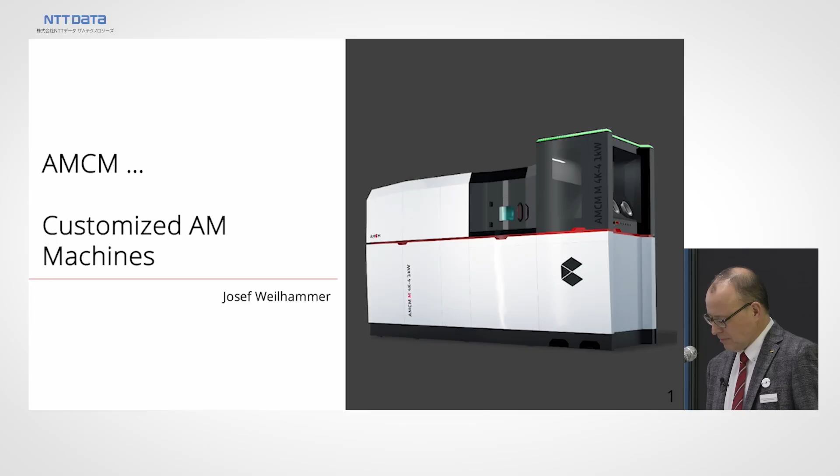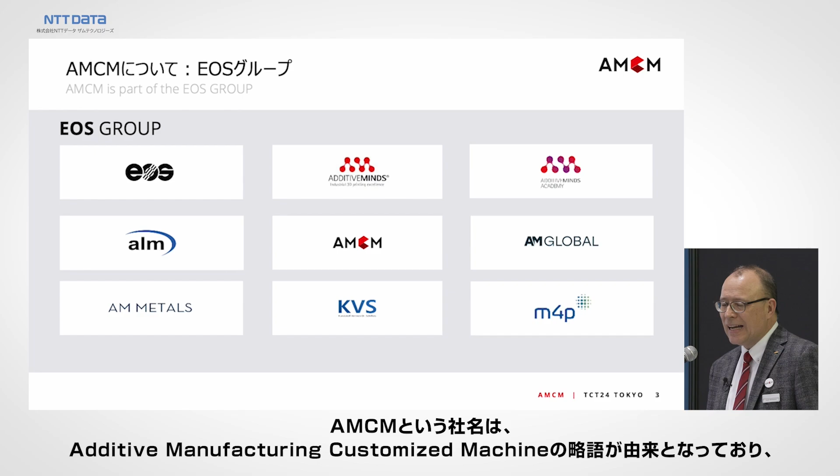Short agenda: some words about AMCM, facts and figures, system portfolio and roadmap. So first, what is the name AMCM? It's an abbreviation of Additive Manufacturing Customized Machine. So what do we do? We customize EOS machines. AMCM is a company in the EOS group, or better call it Langer Group. We are an independent company next to EOS, Additive Minds and AM Global. We are in this group from the Langer company.

Who we are? We are people from, let's say, two sectors. The first group of people is from a laser company, Baasel Lasertech. They have decades of experience in producing lasers and optics. Baasel Lasertech was sold to Coherent, but the team, the R&D people, stayed there in Starnberg. And the other part of the team is EOS people, like me. I worked 23 years at EOS as application engineer, trainer, and also product manager. And also many other product owners and product managers are now in the team.

Short history. In 2016, one year before, Hans Langer spoke with Martin Bullemer: when do we do the machines that we don't do at EOS, because they are so special and we cannot do it at EOS? Then Martin said, I have an idea. I have some former colleagues from Baasel Laser and we can do such customizing. So then the company was founded in 2017.

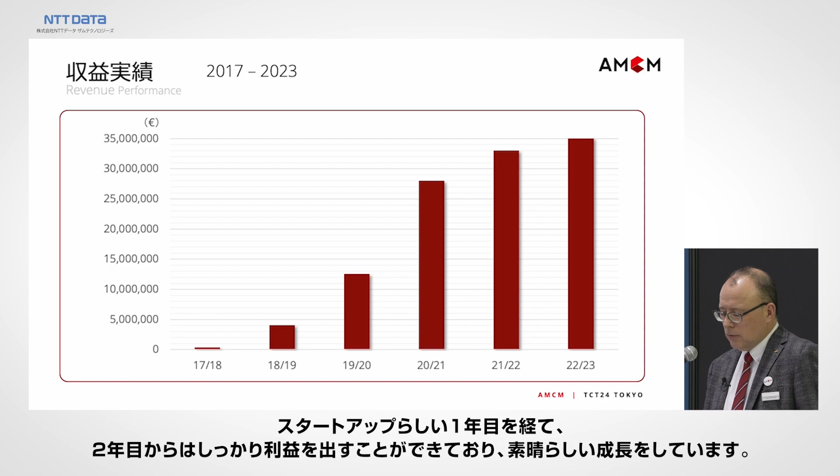So facts and figures. In the first year, Hans Langer gave money. A startup is not earning money from the first year, but from the second year we earned money, and our story is quite nice, we had a good revenue. This is our location in the former building of Baasel Lasertech. In Starnberg we have 5,000 square meters of production area. We can do parallel production of 12 M290s, 4 M4Ks and 2 M450s.

We are very technology driven in our team, so a lot of engineers, product managers, application engineers, and also a service team. We have our own software colleagues and also logistics, but the benefit of the EOS group is we can use shared services from EOS, like IP or also software that comes from EOS. Here is a picture of our production site where we can have 4 M4Ks next to each other in production.

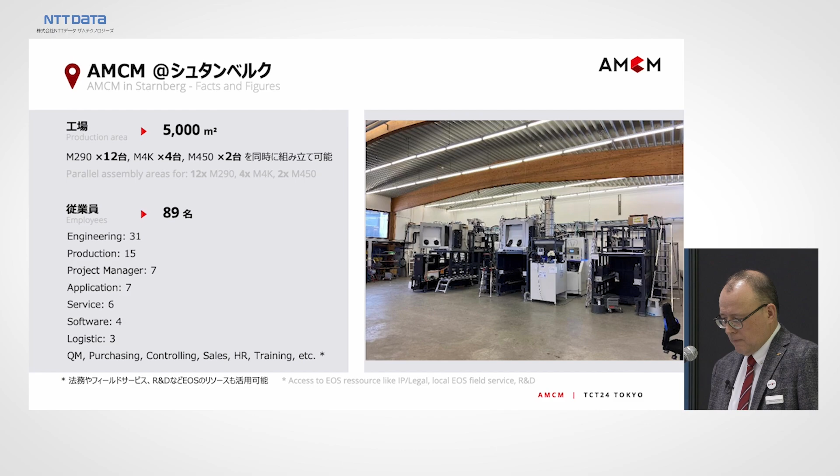We are present worldwide, we have installed already 116 systems: 40 in North America, 57 in Europe, 19 in Asia, and 2 in Australia. And you see it's a mix of metal and plastic machines, mainly metal, but we also do customizing of plastic machines.

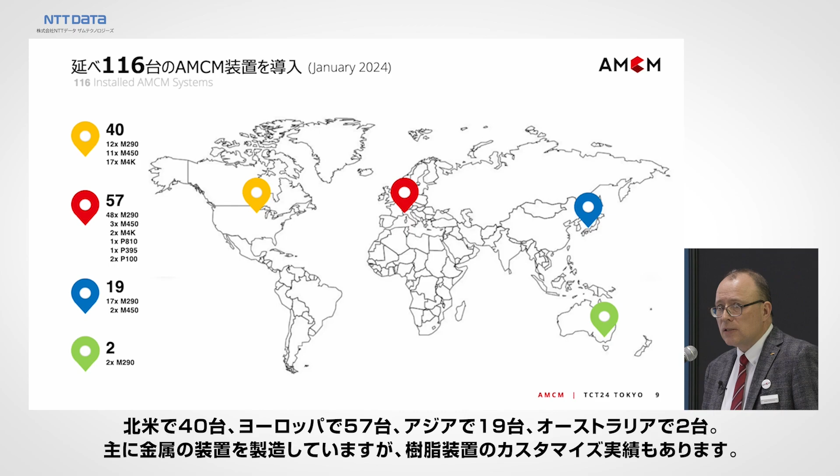Maybe a short phrasing of our vision. We do tuning of EOS machines. You see on the left-hand side machines which look outside still like an EOS machine. They might have a stronger laser or a bit bigger envelope, but this is what we call tuned. The modification is quite easy and the lead time is quite short. On the other side is what we call customized machines. These machines have more modification and they do not look like EOS machines, or they are a bit modified, but this is also a good business part, and today it's about a 50-50 share.

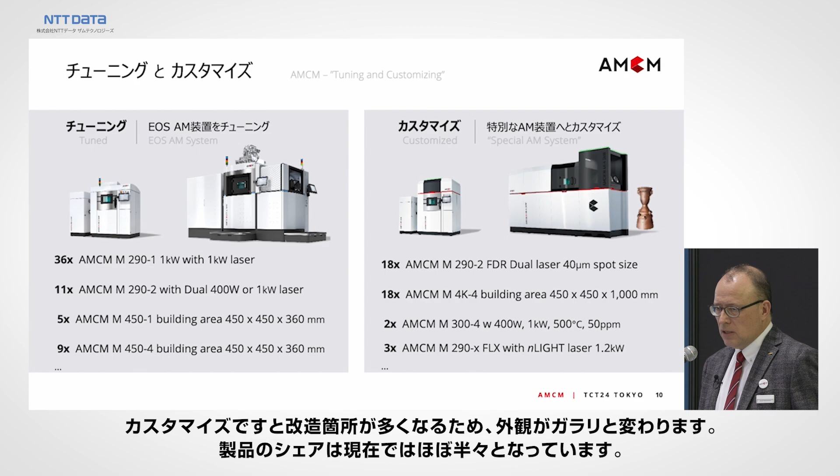Also from this M4K system, we sold so far 20 systems. Most of them are in aerospace and in the service provider area, and there will soon also be one system installed in Japan.

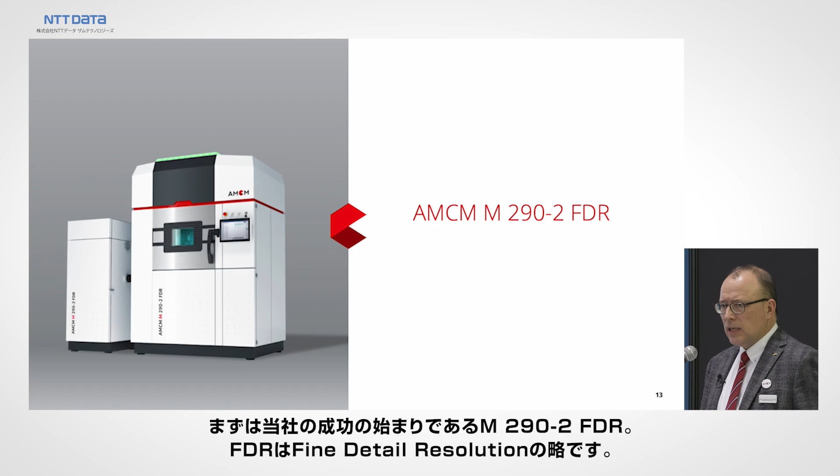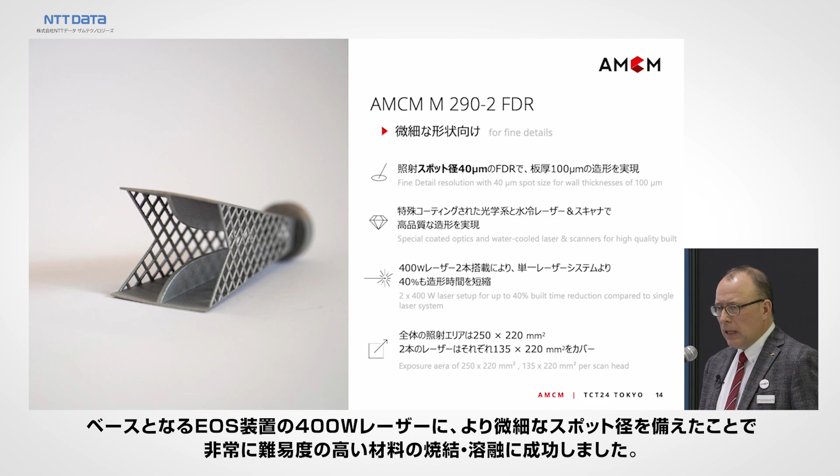Now to our system portfolio. The beginning of our success story was the M290-2 FDR. FDR stands for Fine Detail Resolution, and the purpose of that machine is, with a very fine spot of 40 micron, to make fine structures, and especially with this EOS machine basis with a 400 watt laser and finer spots, we were able to sinter and melt very challenging materials. And I come to that.

The customer has an application, computer tomography. I think many of you know that device. Computer tomographs need a so-called anti-scatter grid. When a patient lies in that computer tomograph, the X-ray source passes the body and is guided through these anti-scatter grids onto a detector.

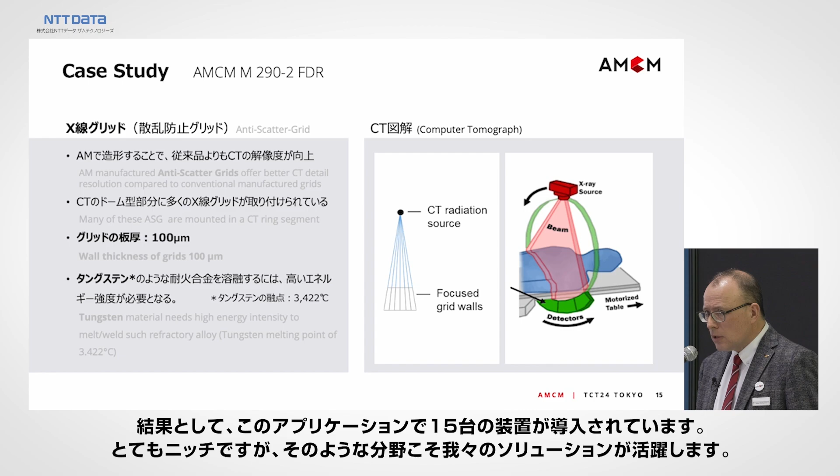The benefit of an additive-made anti-scatter grid is you can take the pictures with less X-ray dosage, and the additive-made anti-scatter grid produces better detail resolution. So the benefit for the patient is double: you have less dosage during the computer tomography treatment, and you have a better detail resolution. We sold more than 15 systems for the same application, so it's a niche, but this is our business.

So that anti-scatter grids are done in tungsten, but the machine can also run stainless steel like 316L or titanium or cobalt chrome. We can supply you also with parameters for these materials on request.

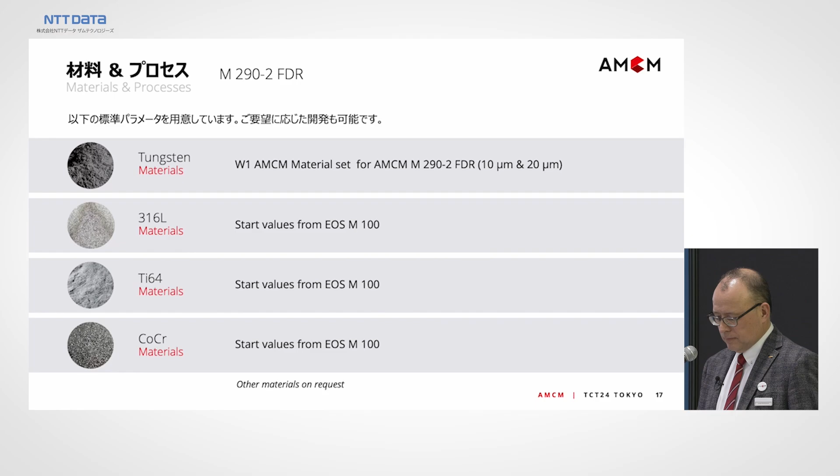The next machine, also similar to EOS, is an AMCM M290 with two 1 kilowatt lasers. The benefit is two lasers. It's like with a car, 4 wheels driven is better than 2 wheels driven, more power. So we have 2 times kilowatt on board.

Kilowatt is relevant for copper or difficult materials, and we have the same spot size as the EOS M290, so you can also use the experiences done on your M290 history, and definitely you can increase the productivity and reduce the cost per part. And also what I will show, we modified the cooling and the gas flow.

It's a bit like in a car. If you equip a car with a strong engine, you also have to increase the performance of the brake or the performance of the cooling, or increase the aerodynamics. The same is what we do. We put more power on the machine, and then we add additional equipment to bring the power on the street.

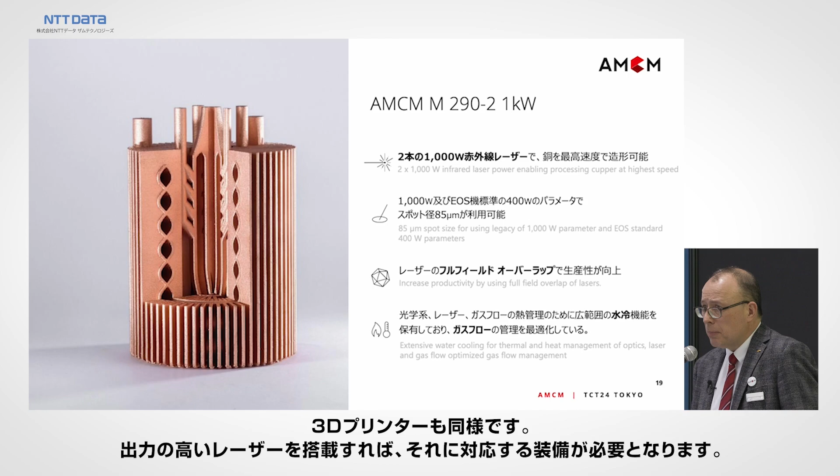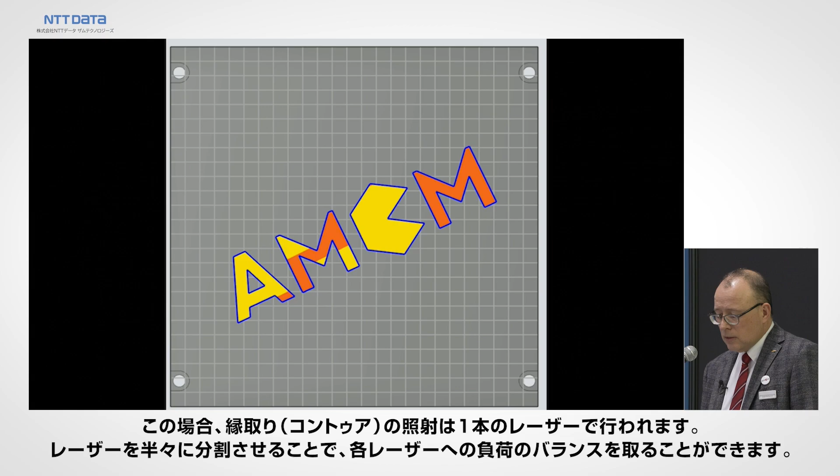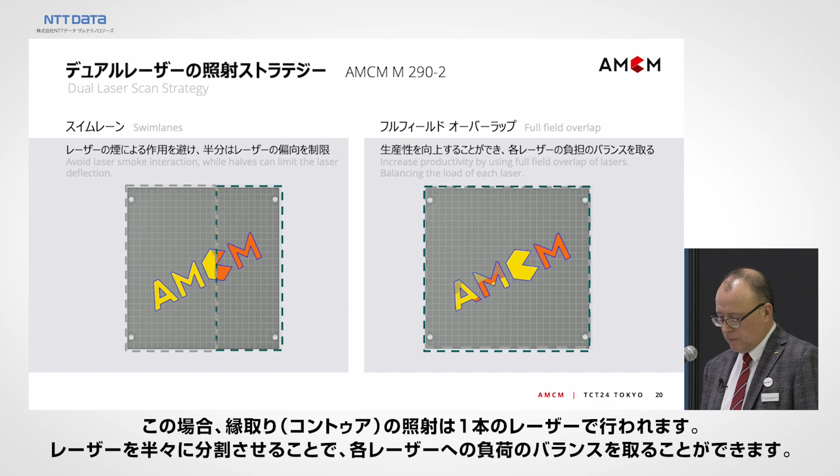The M290-2 has a so-called full field overlap. So we have a scanning strategy where you can either make a split line, what you see on the left-hand side, or you have a so-called full field overlap, where both lasers work in parallel, simultaneously, and finally the contour is done with one laser. So the benefit is you have really a perfect 50-50 split and perfect load balancing. So a very cost-efficient, productive machine.

So this is what I said. If you tune a machine, if you tune a car, you need some improvements. The main improvement to handle 2 times kilowatt is getting rid of the heat, because 2 lasers with 2 kilowatts produce a lot of heat, especially producing aluminium or copper.

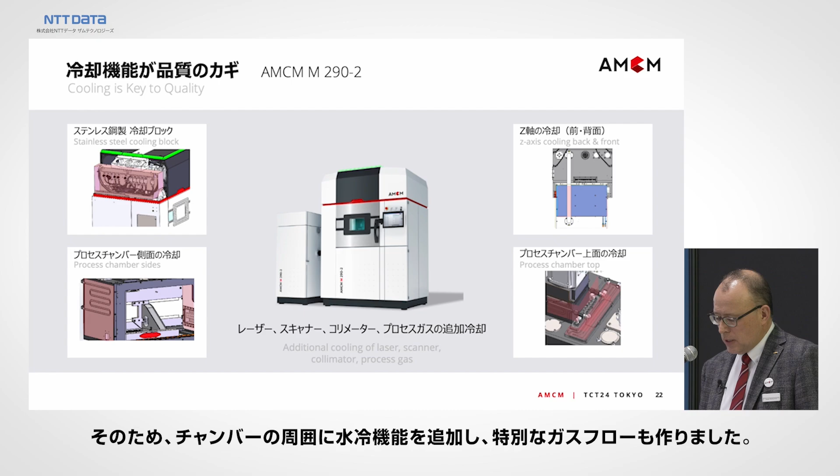So more or less all around the process chamber we add additional water cooling, and we made a special gas flow as well, because whenever you have looked in an additive metal machine and you see the welding process, you also saw the smoke. This is just a side effect of any welding. And having two strong lasers, you just have to improve the gas flow to get rid of these process side products.

And here we made a so-called flow box, which produces a kind of laminar flow to enter a wider flow nozzle and produce a homogeneous gas carpet to remove the gas and the smoke away from the powder bed.

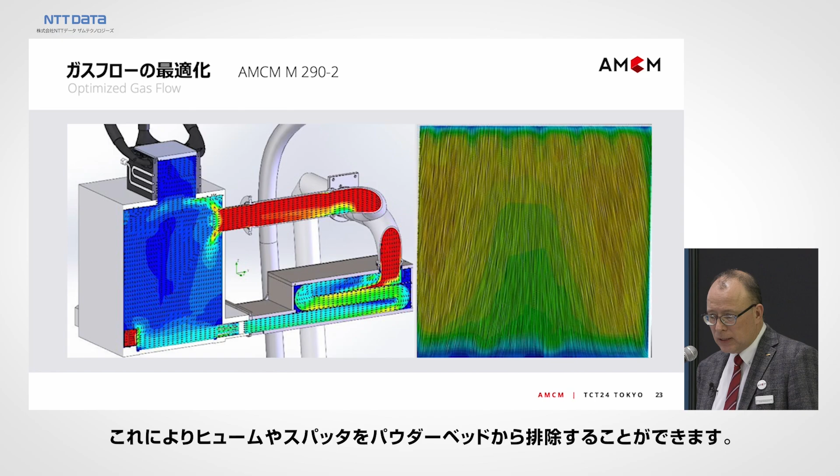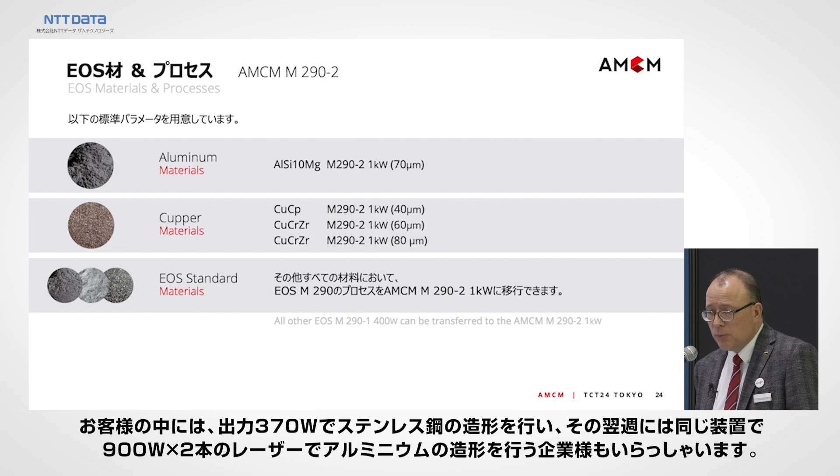Typical materials are aluminium and copper, but all materials which EOS has developed, like tool steel or stainless steel, are also possible on that machine. We have service providers which use that machine one week, maybe with stainless steel, just using 370 watts. And the next week they use the same machine with a maximum power of 2 times 900 watts on the powder bed, maybe with aluminium. So that gives you high flexibility with this machine.

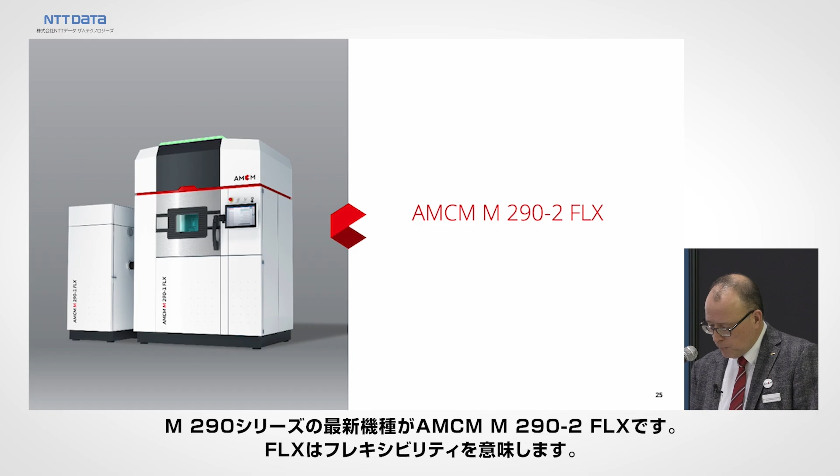The latest product in the M290 version is the so-called M290-2 FLX, FLX for flexibility. As I said, AMCM R&D people have developed lasers for quite a long time. We did a cooperation with nLight, and the result was an AFX laser. An AFX laser which has an additional parameter: you can form the beam.

So directly out of the laser, you get different beam diameters. No defocus, no optical lenses moving. So within 30 milliseconds, you can switch from small beam to big beam. So for R&D people, it's just one parameter more next to laser power, scan speed, or hatch distance.

So in index 0, the default, you have a Gaussian beam. This is like today's IPG laser on the EOS machine. And in index 6, you have a donut, which could be quite big. And in between, the sizes are between 85 and 210 microns. So it's possible to produce a part with maybe the contour in 85 microns, the in-skin in 210, and maybe the support in 180 microns.

The laser has a high power, nominal power 1.2, and in the big mode, we have an effective laser power of 1.1 kilowatts on powder bed. So very, very high laser power.

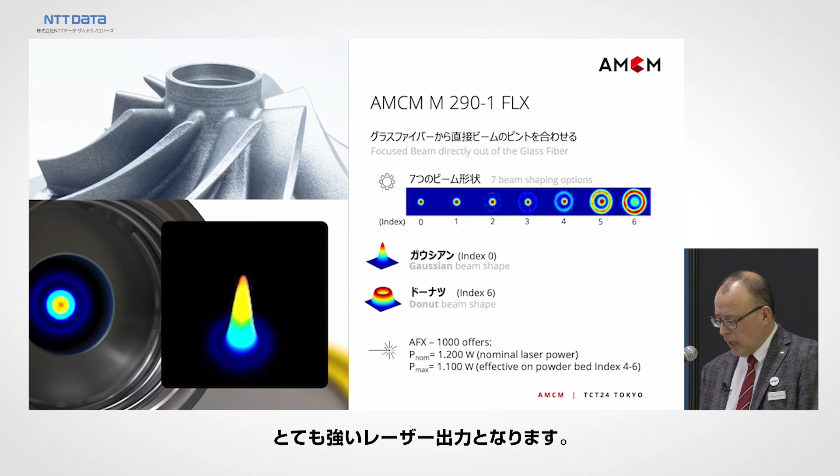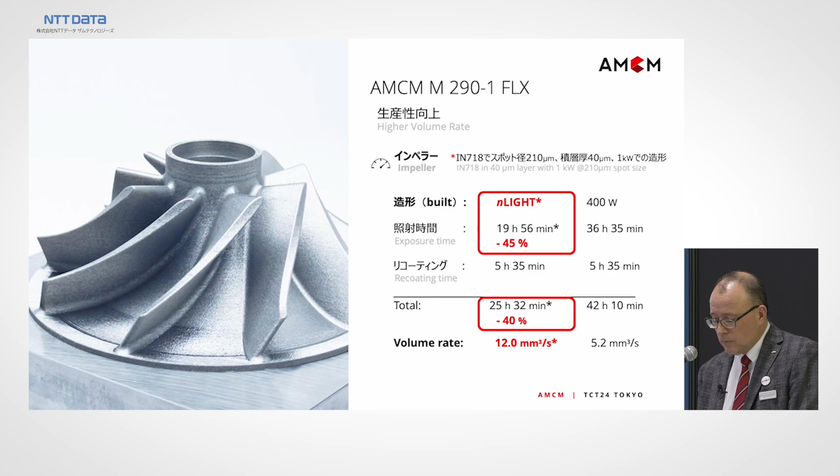But it's not just volume rate. You all see parts here on the show, and you all touch them and you see the roughness. Everybody wants to improve the roughness. It's very tricky to improve the roughness with a very fine spot because it tends to overheating in the downskin. But if you can control the energy in the downskin, maybe with a bit different beam shape, you are also capable of making a better adaptation of the downskin surfaces. So that could also help to improve surface quality.

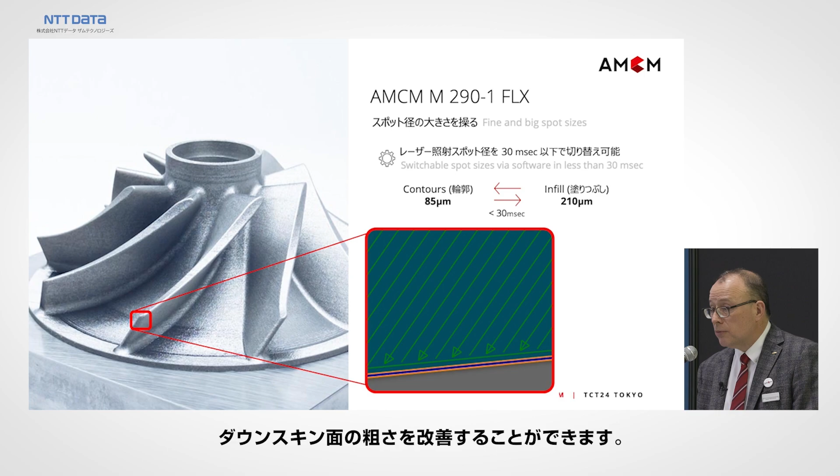And another benefit, it is not a completely new setup. It's a fiber laser, an infrared fiber laser, and in mode 0 it is exactly a copy and correlates with the IPG laser. So you can use your parameters or the EOS parameters also on that machine. And also the kilowatt parameters, as I said, the machine can even go up to 1 kilowatt from EOS, and AMCM can be used on that machine as well.

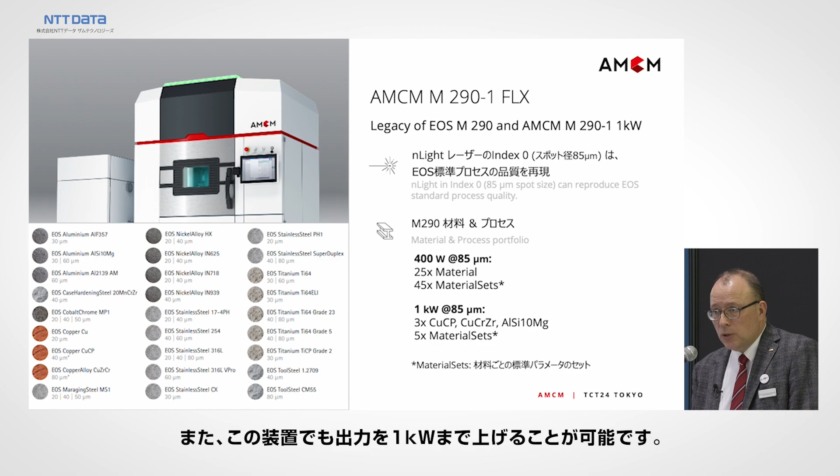Another special feature, I showed you the full field overlap. If you have two lasers, and these two lasers have different beam capabilities, you can use one laser as a kind of in situ heating. So one laser can run in front or run behind and do preheating on the powder bed, on the part.

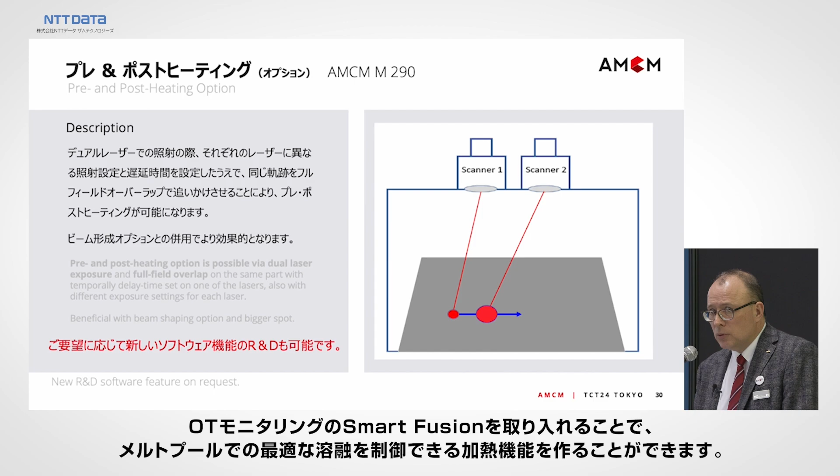Everybody knows if you have a slim, high part, it's very difficult to keep the temperature level from the platform up there as well. And with a clever combination of OT monitoring and smart fusion, you can make here an additional heating feature to control the best melting in the melt pool. And this is an interesting feature of what is possible with full field overlap and with the beam shaping.

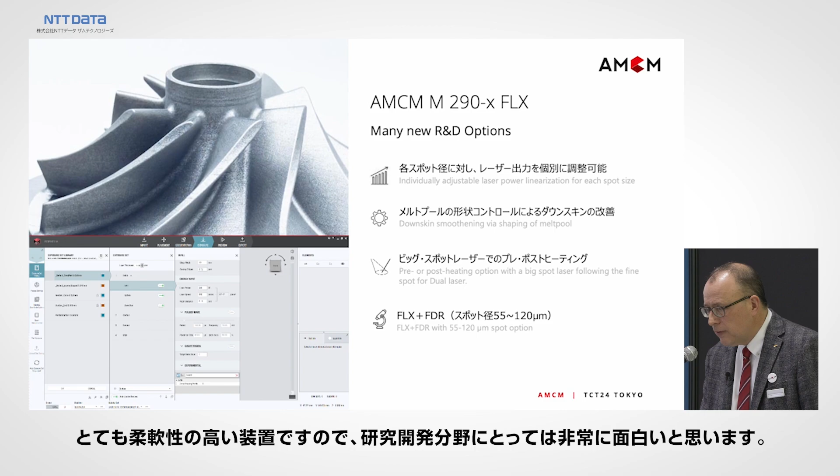The machine is very well perceived in R&D now. We sold 4 of them. So they like the options that they can play around. Here you see already the EOS print window with the parameters where you can set the index. You can increase productivity. You can play with pulsed laser additionally. You can have pre and post heating. And we also have an option to have even smaller spots if you want. So that is a very flexible machine and interesting for academia, I would say.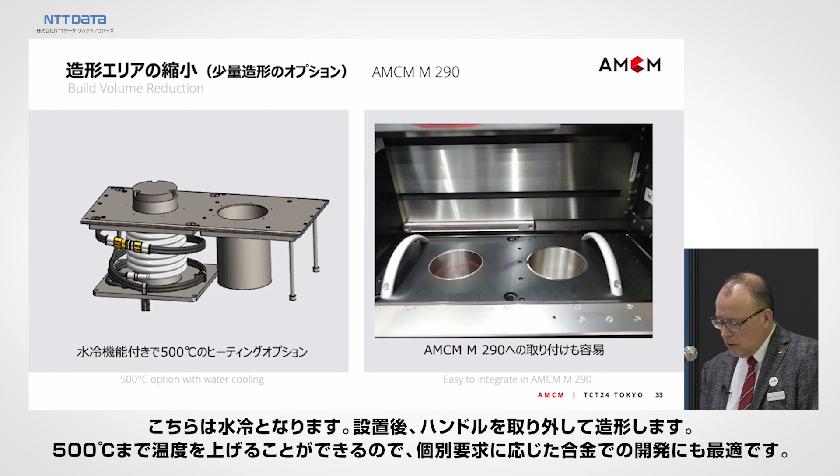So AMCM also made some M290 options for R&D. For example, a build volume reduction, where you can use small quantities of powder inside, some people call it minimizer, and that has a water cooling, so you can use demanding materials. And you put that in the machine, you remove these handles, and then you can run demanding materials at a temperature level up to 500 degrees. The platform size is 100 millimeters in diameter, and in Z it's also 100 millimeters. It can be removed again and put in as you like.

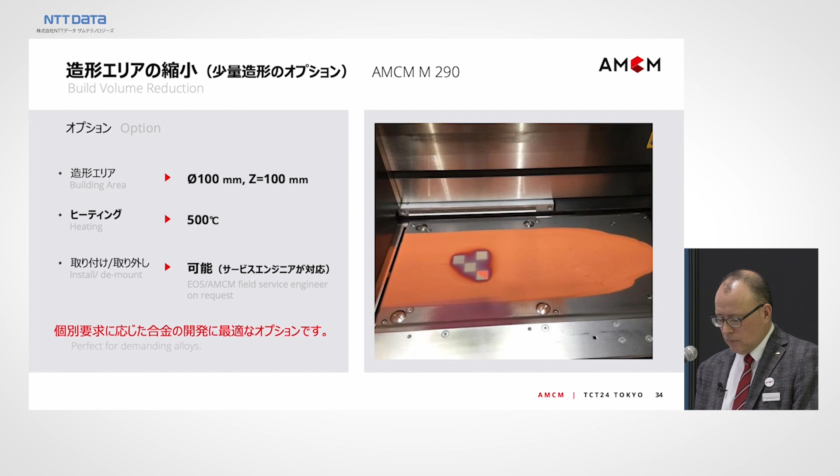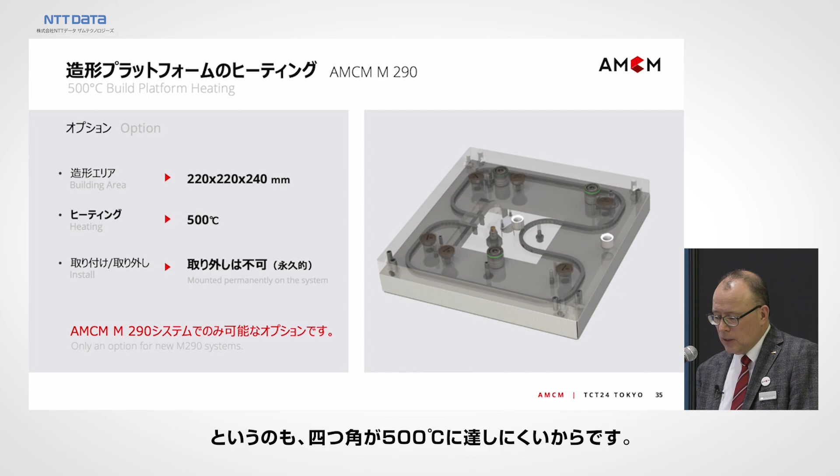As a permanent option, we also have developed the heating. So the platform size is 250 by 250, but the recommended build area to achieve 500 degrees is 220 by 220. The corners are a bit colder. We use the same heating also up to 600 degrees, then we limit the building area to 200. For R&D purposes, we also made one machine with even higher temperature. So please let us know if you have a demanding application. We can support you. This is our job, to customize machines also with heating.

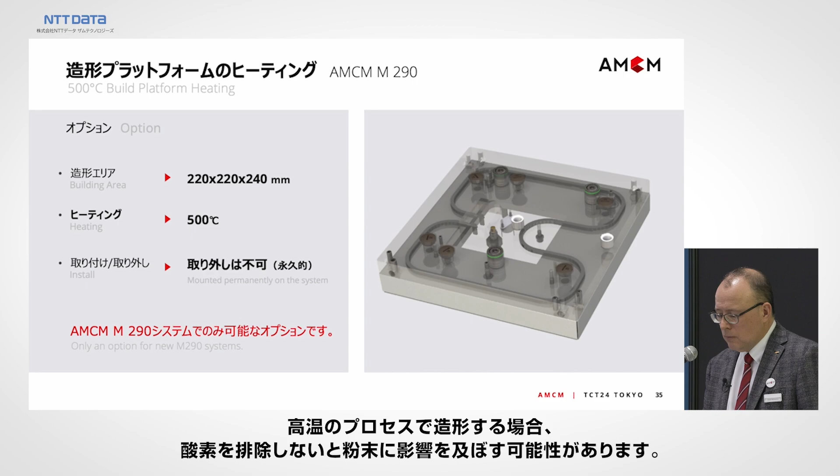What we learned from a customer case with heating: when you work in a hot process, your powder might suffer if you don't remove the oxygen. So there is a very simple device where you can purify the process gas and remove oxygen and moisture out of it, and you can run the process in a condition of, let's say, below 50 ppm, and you can test and produce parts which have demanding properties. It can also be upgraded later on if you want, so that is also sold for research purposes.

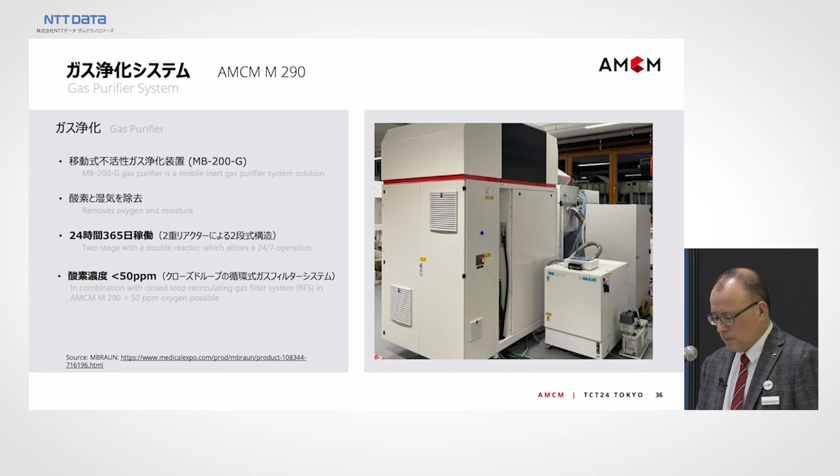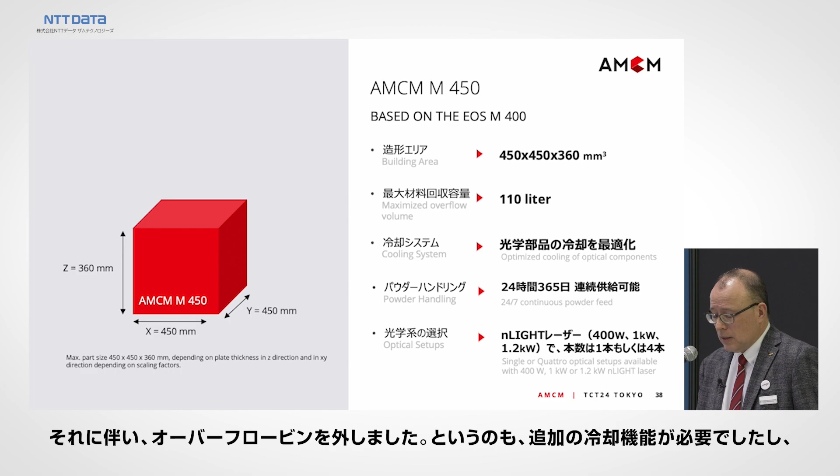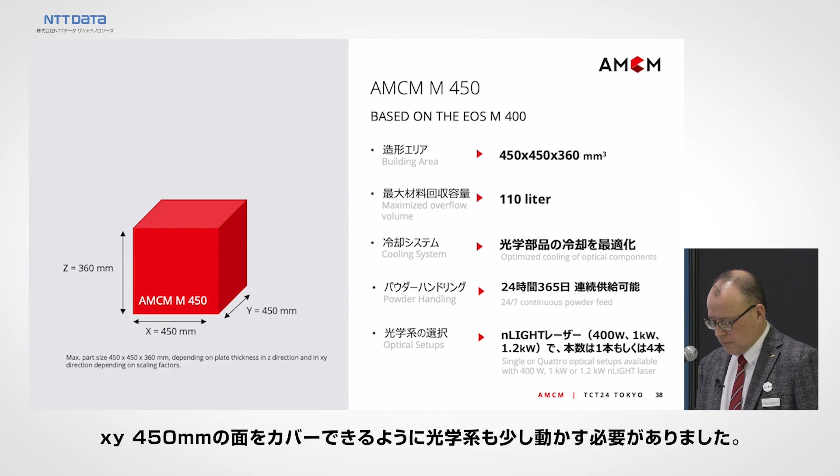Now to our big machines. The M 450-4 looks very much the same as the EOS M400-4, but we made some improvements. So for sure the envelope is bigger, 25% bigger in X and Y. We had to remove the overflow bin because we have a bigger envelope, and also added some additional cooling. And in the optic, we moved the optic a bit so that we can cover a field of 450 by 450. Sounds simple, but as you all know, if you want to make a racing car out of a car, you have to think about some details.

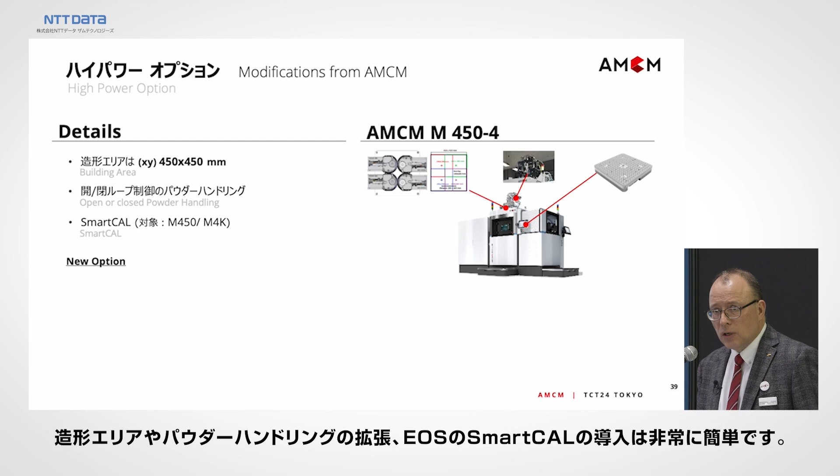So the building area is bigger, powder handling is quite easy. SmartCAL from EOS is easy to adapt, you just need a bigger platform. But we also added other features which are relevant, like smart monitoring and OT, where you have the capability to control the process much better. The nLight laser, also for that big machine, gives you the capability to be much faster and have higher productivity. Also the gas flow: as I said, if you have more lasers, more laser power, you have more smoke, and then you also have to remove the smoke. And that is why we have also an optimized gas flow integrated.

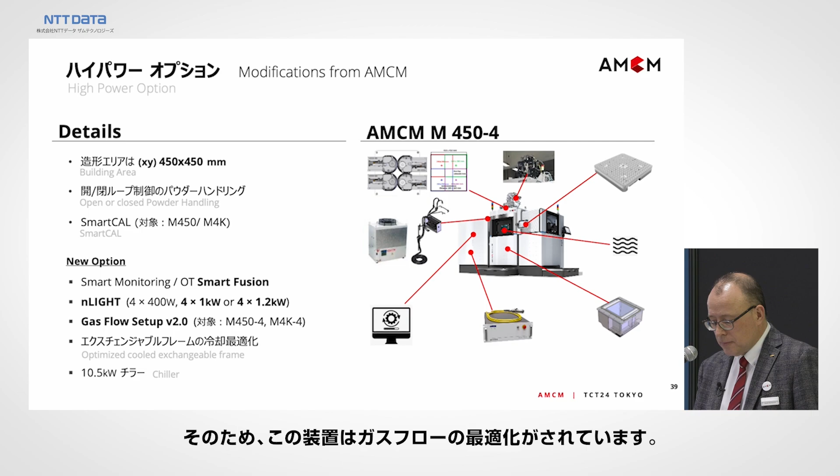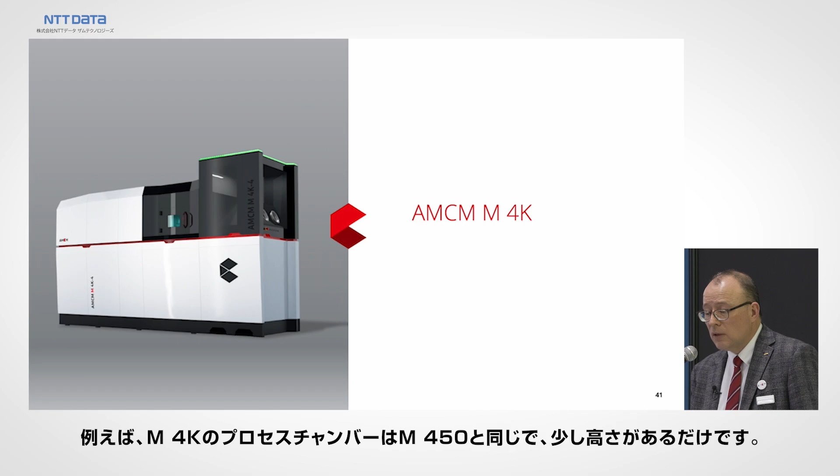M4K is just a bit the larger brother of M450. Many elements are similar. For example, the process chamber of M4K and M450 are identical. It's just a bit higher. So what's the benefit of that machine? It can produce parts with 1 meter height in Z, and the machine can be equipped with up to 4 times kilowatt or 4 times nLight, and it has also special cooling in the build envelope, and also has capabilities to run the EOS parameters as well.

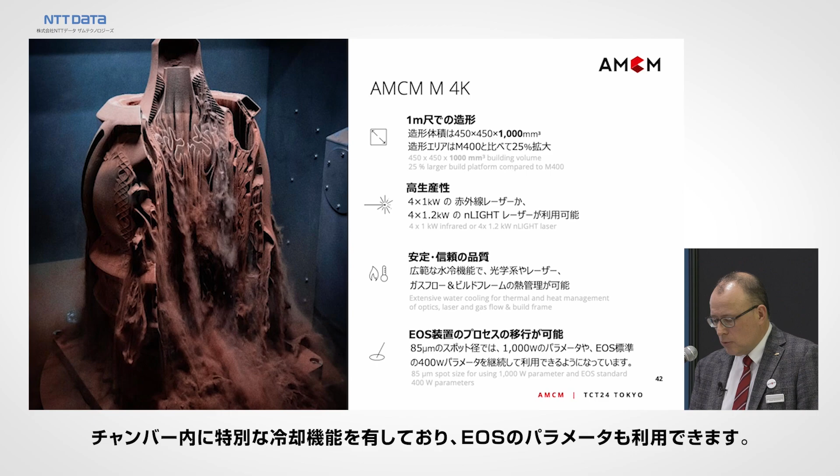So 1 meter part for that rocket diameter-height ratio, that is a good fit. The machine looks very different from outside, but inside, if you see, there is a process chamber identical to EOS, the filter system identical to EOS, dispenser, software, monitoring. People who can operate the M400 will find just one push button in software which is different. The rest is identical EOS M400 software.

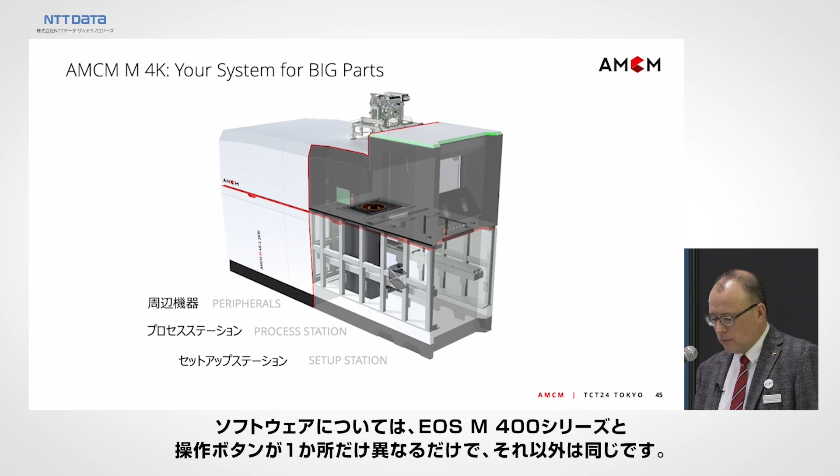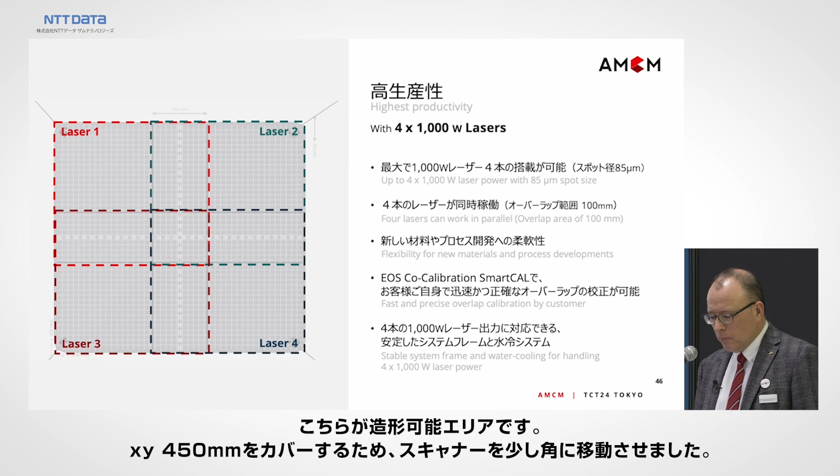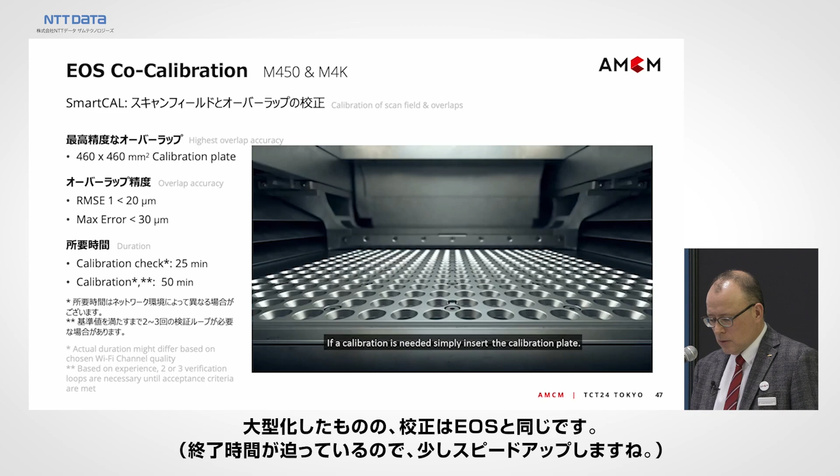So this is the envelope. The scanners are a bit moved to the corners to cover the envelope of 450, but the overlap area is 100 like on EOS M400. Also calibration, same like EOS, just bigger. Just speed up a bit to stay in time. Main material which is ordered from our customers so far is Inconel 718, copper alloys for these rockets, but as I said, the machine is like an EOS M400-4. You can utilize all parameters from the EOS portfolio.

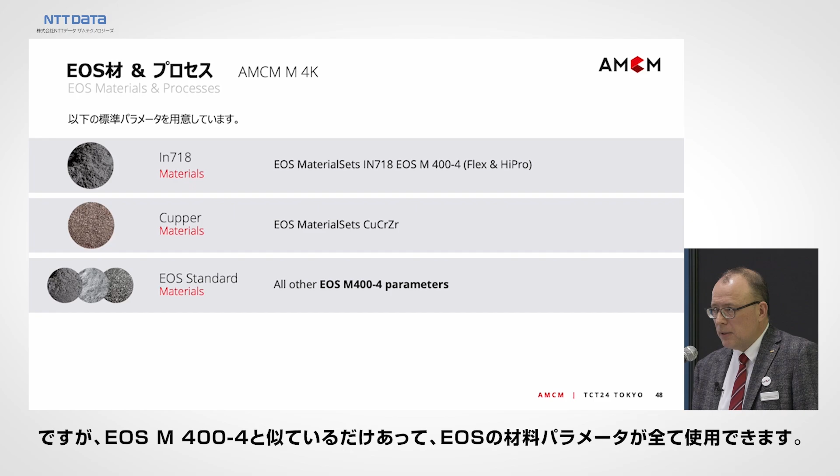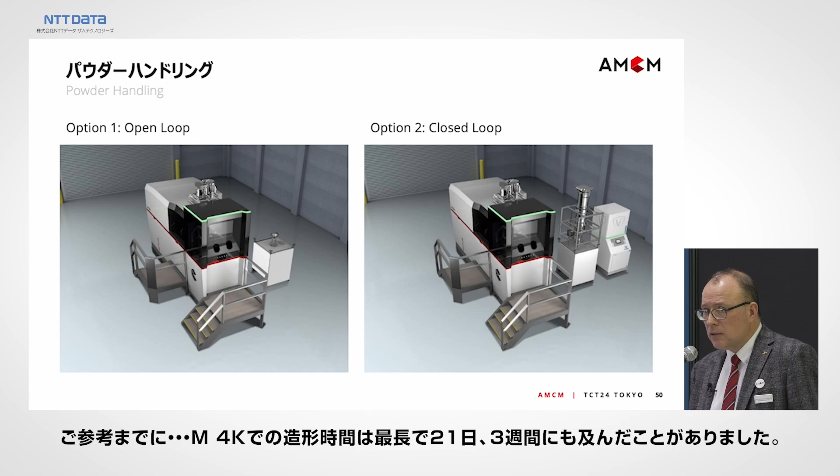Having huge machines, you have to feed them. You have to feed them with a lot of powder. AMCM developed together with Volkmann powder handling options. We call it open loop and closed loop. Just to give you an idea, the longest job ever built on an M4K was 21 days, 3 weeks. The machine should not stop, should not run out of powder, because that is very expensive.

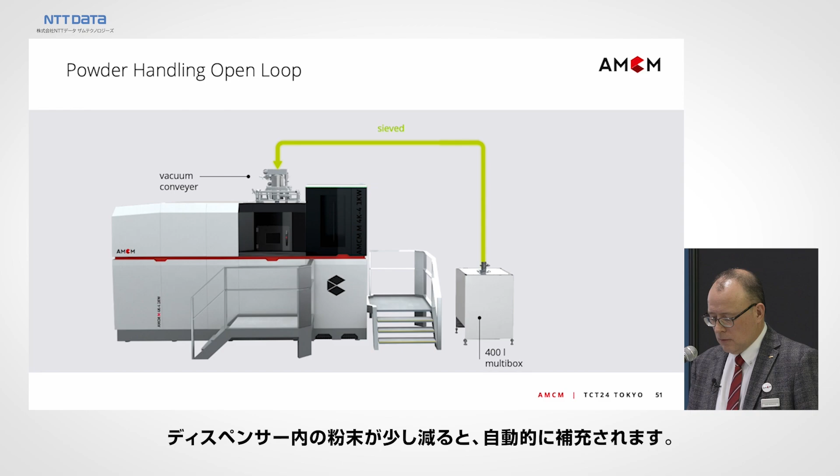So open loop means we have a 400 liter bin next to the machine. That 400 liters are good for, let's say, 2.5 jobs even, so plenty of powder. And whenever the machine dispenser is a bit empty, it asks for powder and gets fed. We also offer so-called closed loop, where a sieving station is included, and you can more or less pump the powder in a cycle. Most often, closed loop is ordered.

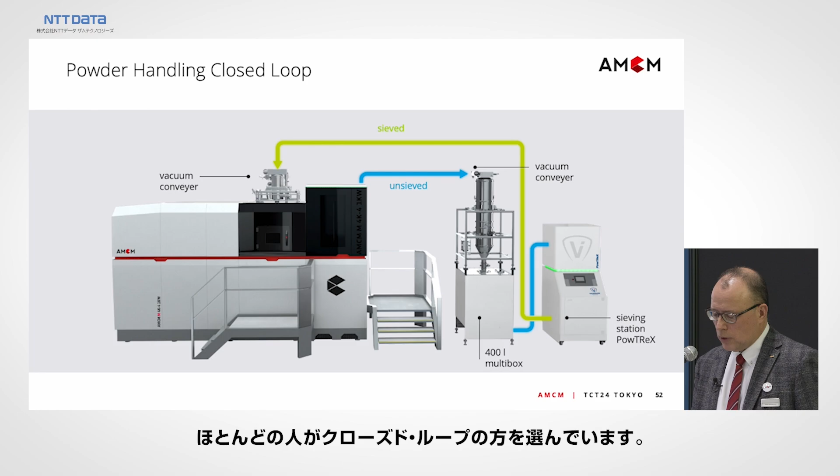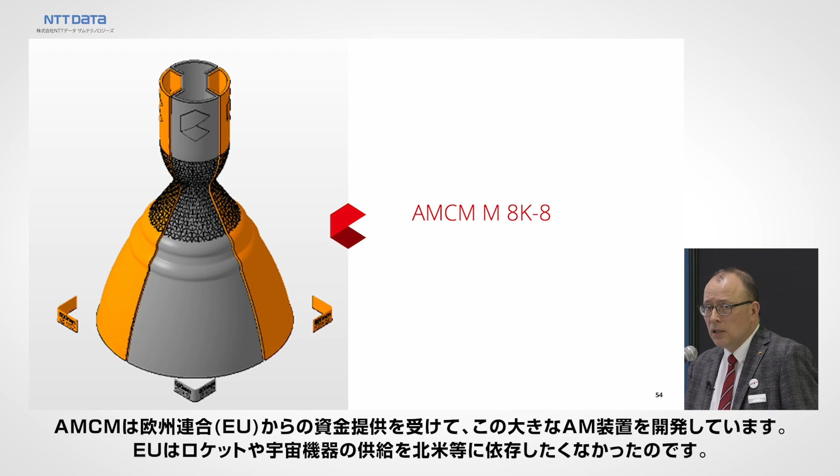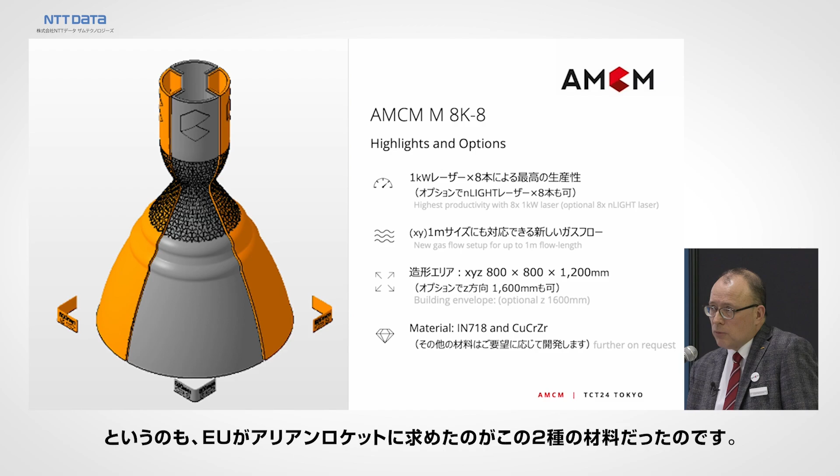Finally, I come to the latest R&D product AMCM is doing. It's an M8K. So AMCM got funding from the European Union to develop a large-size AM system, because the European Union does not want to depend on North America or others to deliver rockets or equipment for space. And so we got funding to develop an AM machine which is large size, so 800, and 1.2 meters. It has 8 lasers, and materials which could be processed are Inconel and copper, but also others. But this was what the European Union asked for that Ariane rocket.

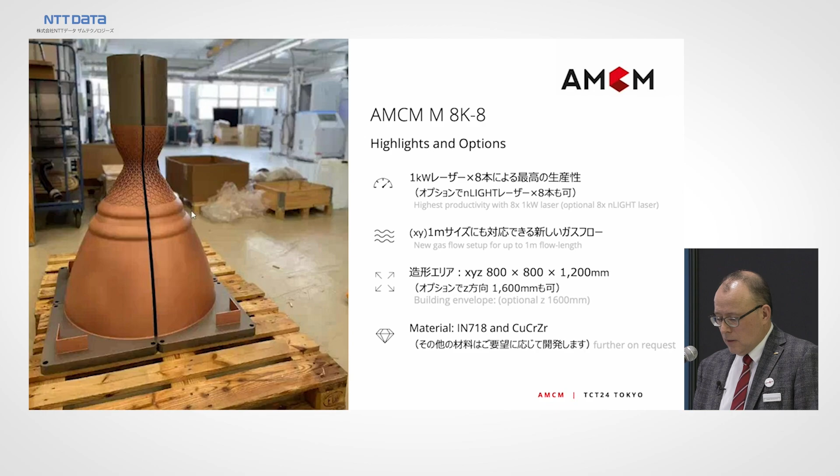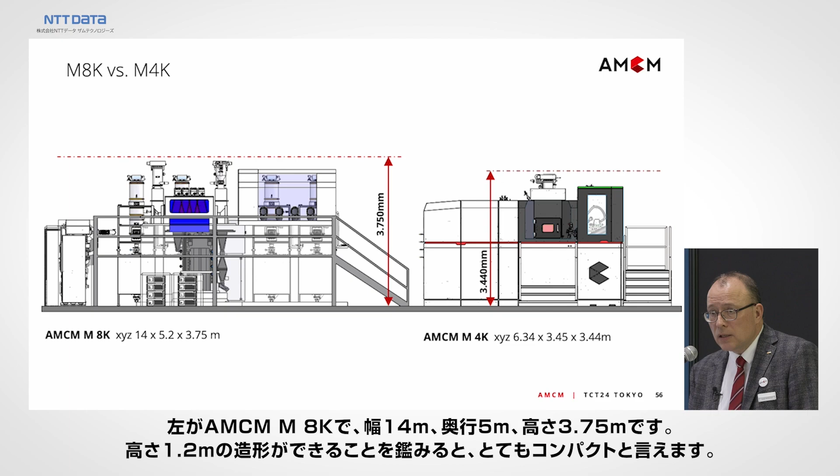This is a demo part, which you also see on the EOS booth over there. It was produced with M4K in 8 pieces, just to show the final dimension of such a part. The machine is, even if it is a big envelope, quite compact. On the right-hand side, you see the AMCM M4K, which is 6 meters by 3.5 and 3.5 in height. And the M8K will end up at 14 meters by 5 meters by 3.75 meters. Quite compact for, let's say, 1.2 meter high parts.

And this is what we are aiming for. This is what the European Union is interested in, to equip their own rockets with these Vinci and Vulcain bell nozzles built in Europe or from a European supplier.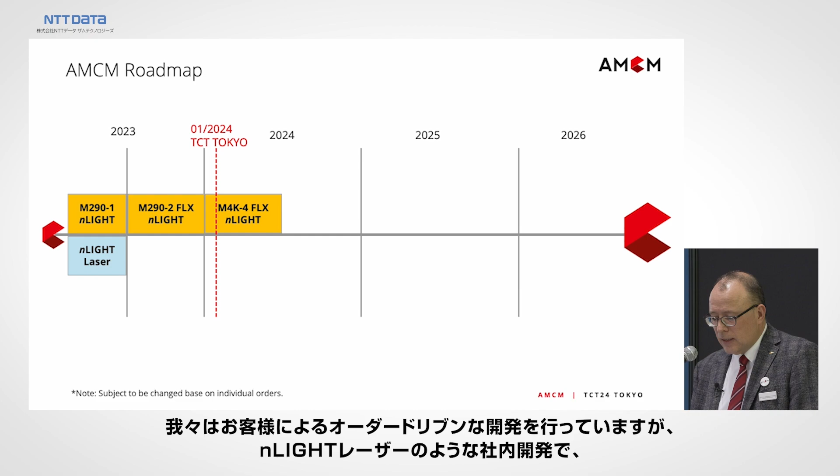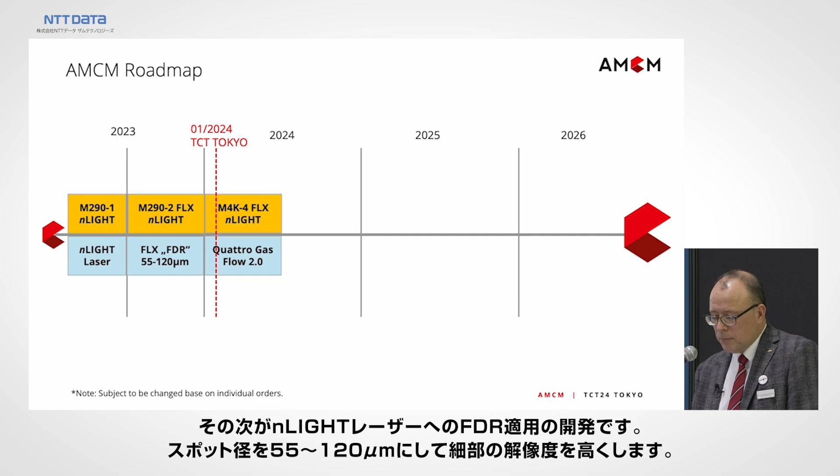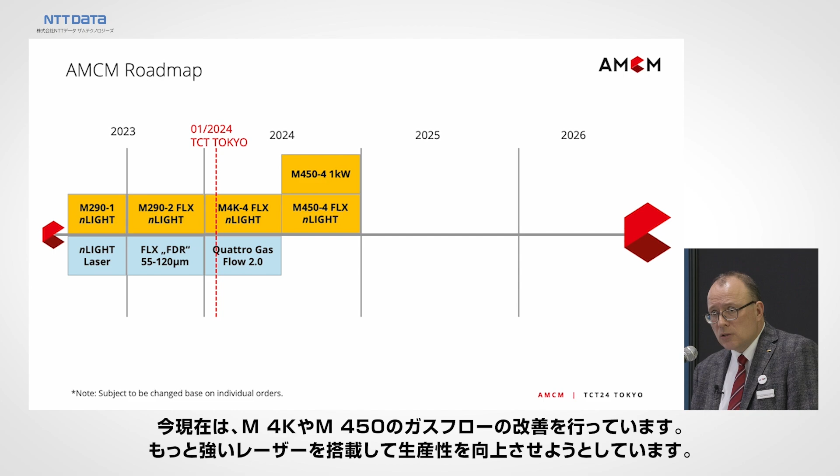A bit of a roadmap. We are very driven by orders, but we do also some internal development, like now with nLight laser, to have special machines equipped: M290-1 with 1 laser and nLight, M290-2 with dual laser, also M4K. The first machine will also be produced soon. Next is what I mentioned, the nLight with fine detail resolution, spot size 55 to 120. And these pre-development blue boxes end up in new machines. Currently we improve the gas flow of the M4K and M450 to be able to add even more energy and stronger lasers in that machine and to be more productive.

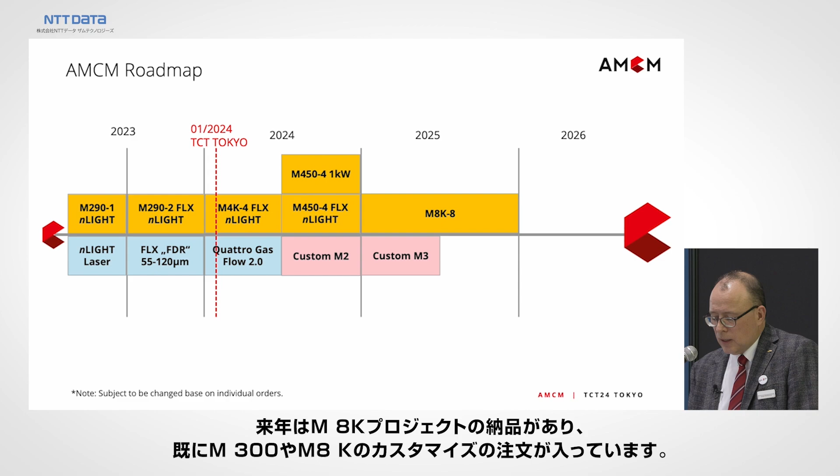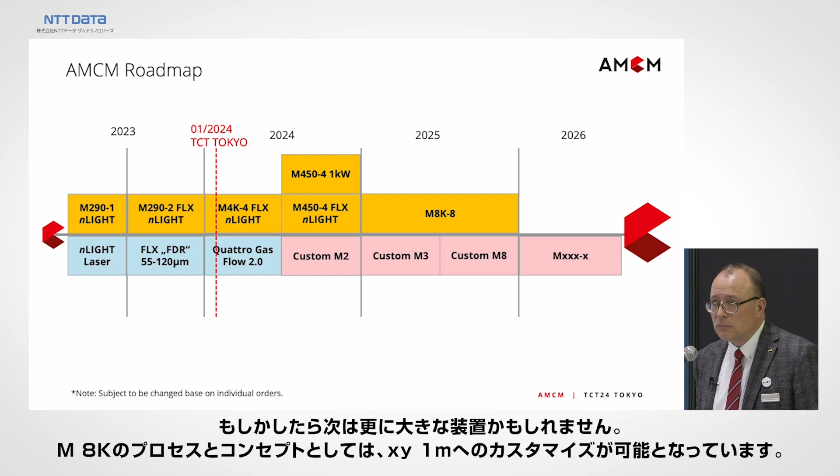And we also get other customized machine orders in. Next year we have also this M8K project and delivery. And we know that there are already M3 and M8 customized orders in. And then let's see what comes next. We customize when orders come in, and maybe even bigger. The process and the concept of the M8K is capable to go up to 1 meter in X and Y. So if somebody wants to hit that limit, we are prepared.